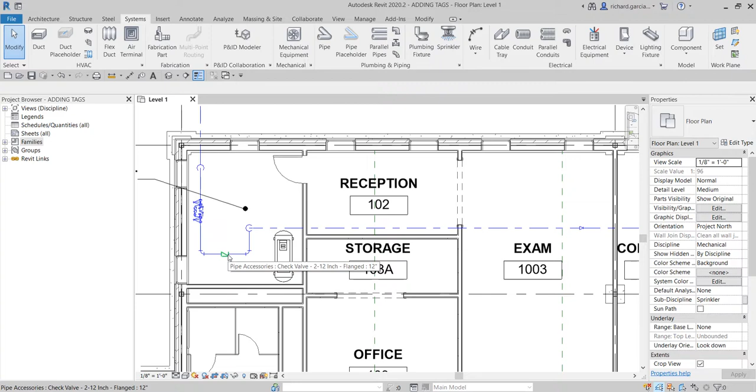In this video, we are going to learn how to add tags to our sprinkler design. Just a recap, in our previous video we learned how to add some equipment, and then we also learned how to add some fittings and accessories like valves in our project. This time around, we are going to add some tags to our pipes.

Specifically, we are going to add pipe sizes to our pipes using the tag tool. To start with, I'm going to select the Annotate tab, and then from the Tag panel, you can see here the tag by category. This is our guide, so this is the one we are going to use: tag by category.

The shortcut is TG, or instead of going to the Annotate tab, you can simply go to your quick access toolbar to use the tag by category. It's already added by default there. So our tag by category tool is already there, so you can just simply click that one. When you click that tool, you can see here the options for the tag by category.

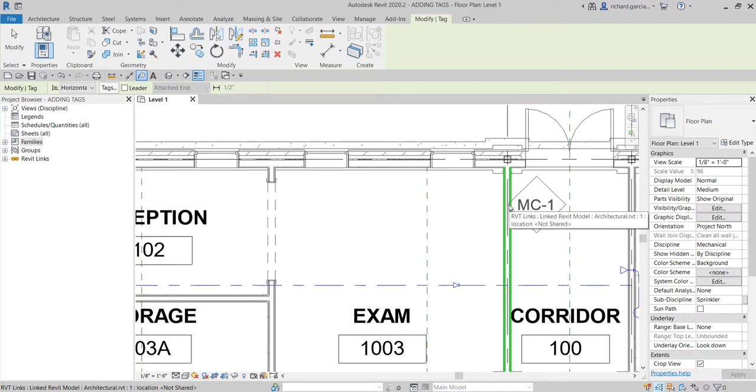The first one here is the placement of your tag. What I'm going to do is hover my pointer to one of the tags, and take note our tag by category tool is intelligent. If you hover your pointer on the linked model, it will show you what that particular object is, and it will show you the tag loaded for that particular element. So in our case, if I hover my pointer to the pipe, you can see that it will put the pipe size here.

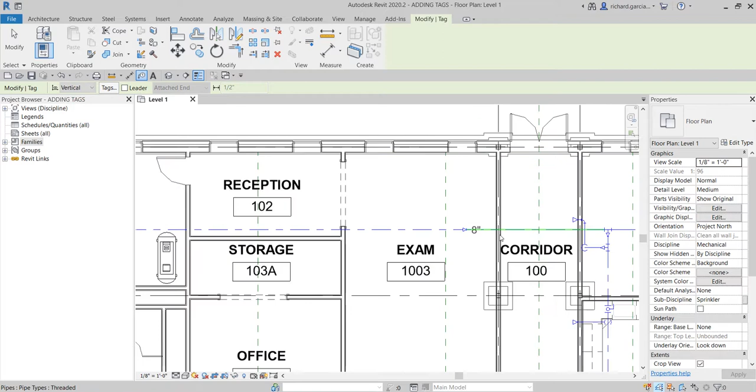The settings here is horizontal. If I change this to vertical, it will look like this. For the pipe, it will just follow the direction of the pipe. But if we hover our pointer, let's say to our door, that's horizontal, and for the vertical it will look like this. But for the pipe, the setting is it will just follow the direction of the pipe, whether vertical or horizontal. This option matters to other types of elements in Revit.

That's the placement of your tag, so I'm just going to use horizontal here. And then you also have here loaded tags.

If you click that, you can see here all the loaded tags in your project. Like for example, in our case, if I hover my pointer here, I can see that the loaded tag for pipes and pipe placeholders is pipe size tags. That's why if you put your tag or click your pipe, it will show us the pipe size tag. But if you want to add another type of family for the pipes, another type of tag for the pipes or pipe placeholders, you can always go to the Load Family option here.

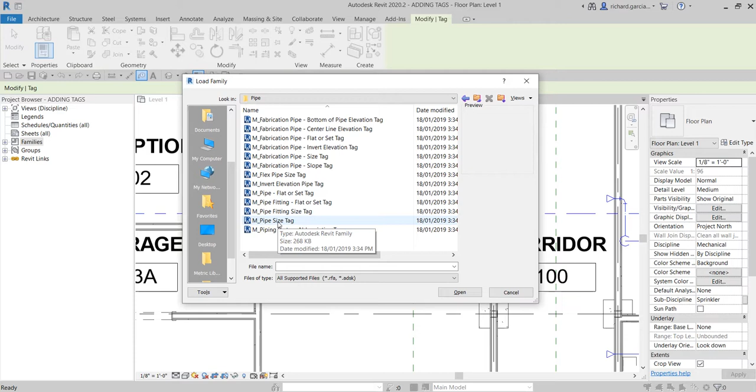Let's check this out, so I'm going to select that. And then you need to go to annotation, and then pipe. After that, you can see here the different types of tags, including the ones that are loaded, which is pipe size tag. So if I'm going to select, let's say, pipe fitting size, I'm going to load this.

I'm going to load this M invert elevation pipe tag, and I'm going to load the piping system abbreviation tags as well. I'll click these three to open and load it.

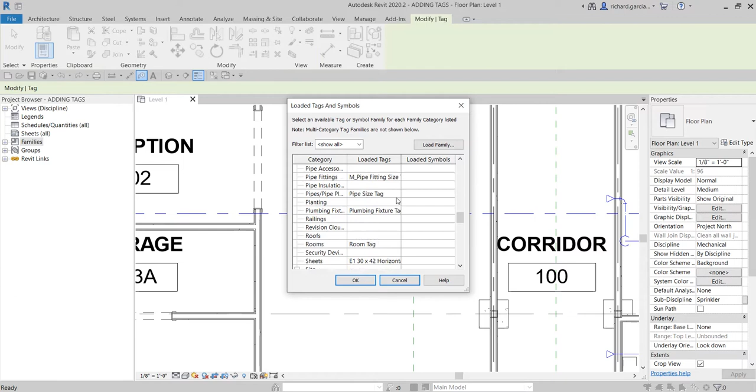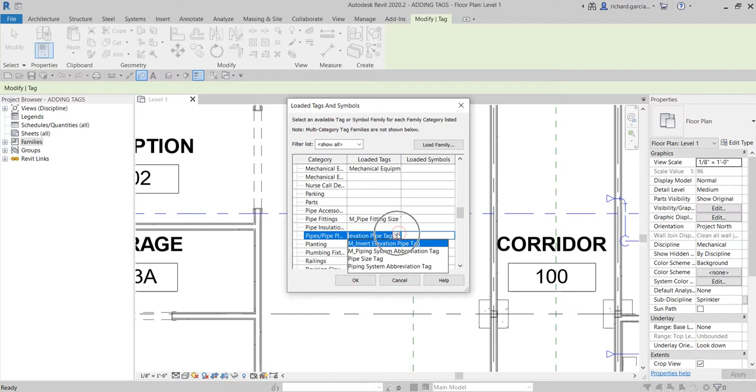The default one here is the pipe size tag, which shows us the size of the pipe. If I change that, let's say I want to check the invert elevation, I'll select M invert elevation, click OK, and then click. As you can see, it shows me the elevation of the pipe, the invert elevation.

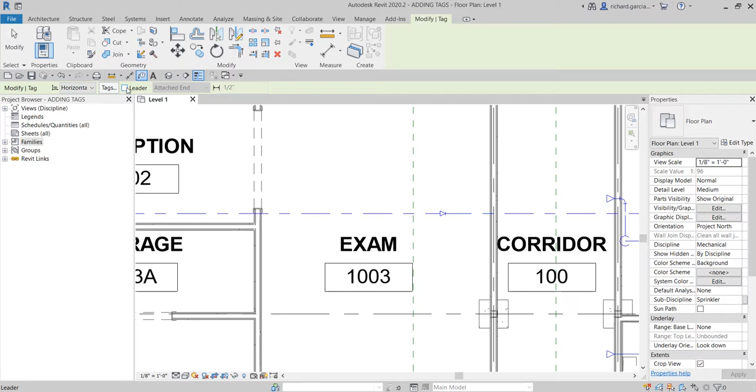Let us now start tagging our models. I'm just going to pick somewhere here, and then pick one here. Probably I'll just put one here.

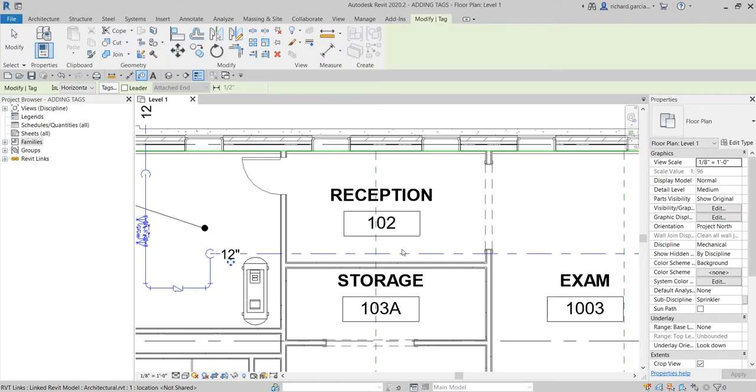Tagging is very important because it's the one that will tell us, or give us clarity, so that we will know what type or what size the pipe is in our project.

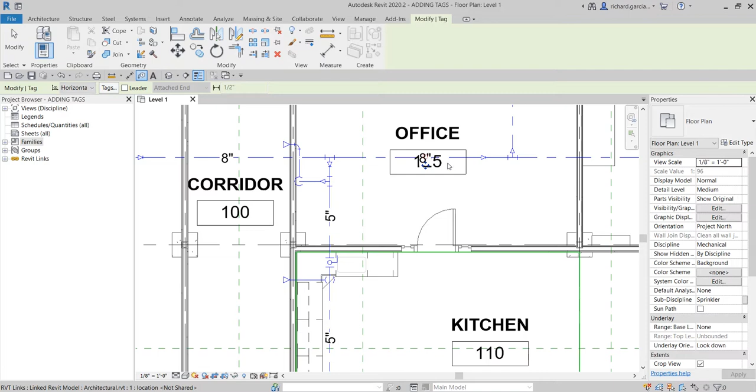So I'm going to pick one here again, one again, and then pick one here, and this one let's put there. I'm going to put one here as well. I think that's all. So, okay, somewhere here, there you go.

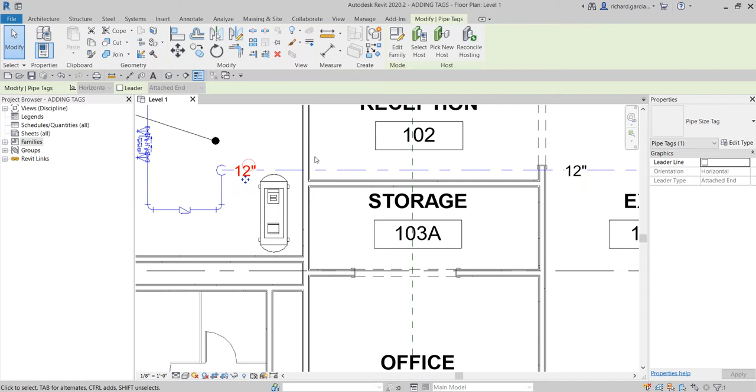We can still click that, and then use the arrow symbol or the arrow on the keyboard so that we can nudge the location of our pipe tags. And I'm going to click the pipe here so that it will not be too close to our wall.

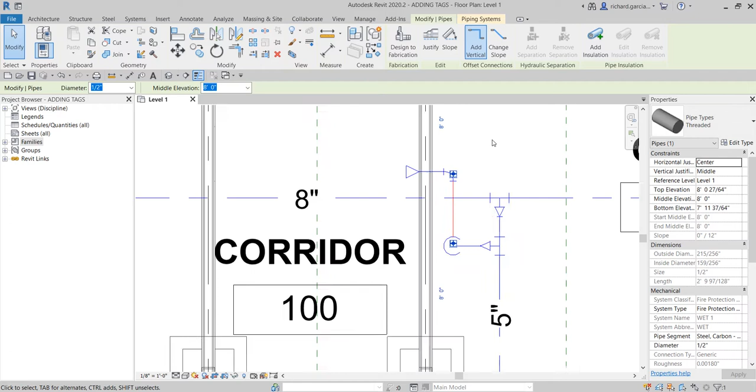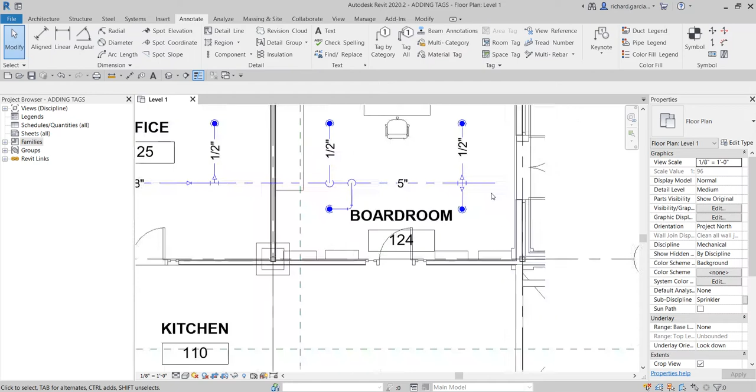And then you see our room tag, or our space tag, is too close, so I'm going to drag that so that our model here is tidy. You always do that. There you go. For this one, I'm going to drag that somewhere here, and then I'm just going to put a cap there.

All right, so there you have it. Basically, that's how you add your pipe tags to your project.